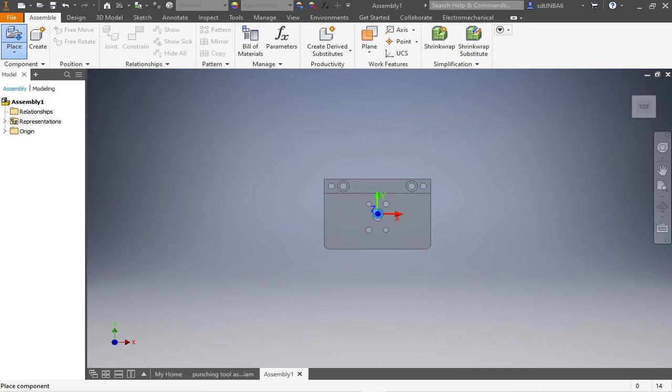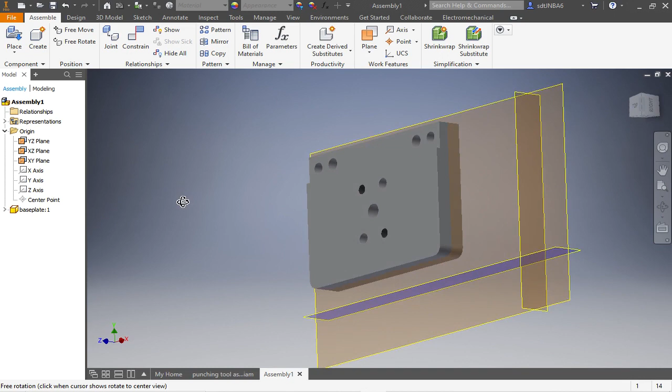Bring in the base plate. For the first part, I always like to see all the origin planes, so I'm going to switch on the visibility. In my case, I want the retaining bolt pointing to the Z-axis, so therefore I have to place the bottom of the base plate on the Z-X plane. Go on Constrain, take the bottom, take the XZ plane, and make sure this part is pointing upwards. Say OK. To make the visibility a little bit better, go on View, go on Visual Style, and switch on the Shaded with Edges. Now we can see the part better.

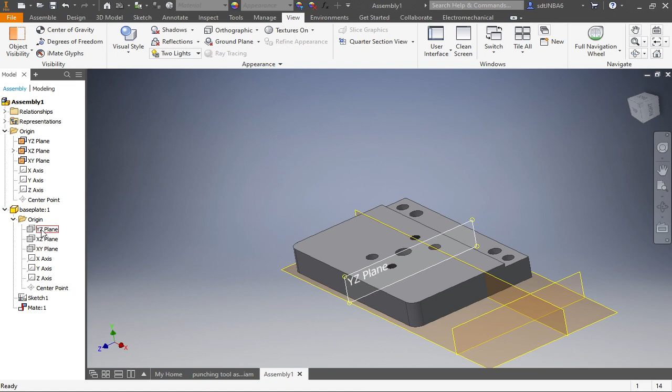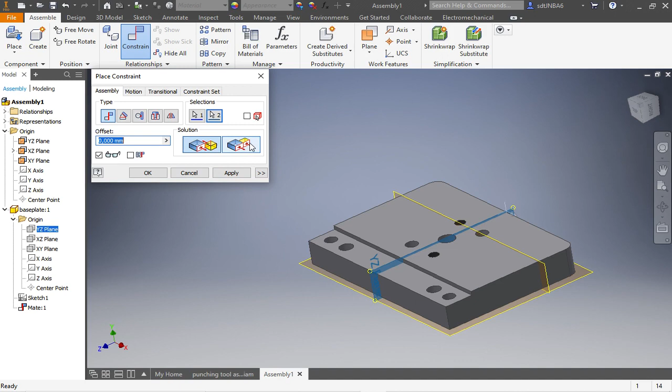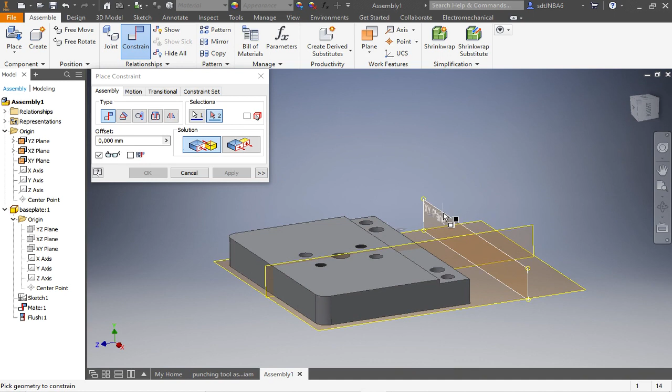So the next thing we have to do is putting the center of the base plate to the center of our coordinate system. It's the YZ plane. So go on the base plate, go on Origin, take this plane, the YZ plane, assemble, go on Constraint, and now we have to make it center to this plane. Now take care, the part is pointing the other direction, but I want to have it to the positive Z direction, so I have to flip it around. The solution here is taking the flush option. Say OK. Now the only way to move it around is like so, and I want to have the back of the plate matching up with this plane here. So go on Constrain, go on this plane, and on this one, the XY plane, apply, and then we're done.

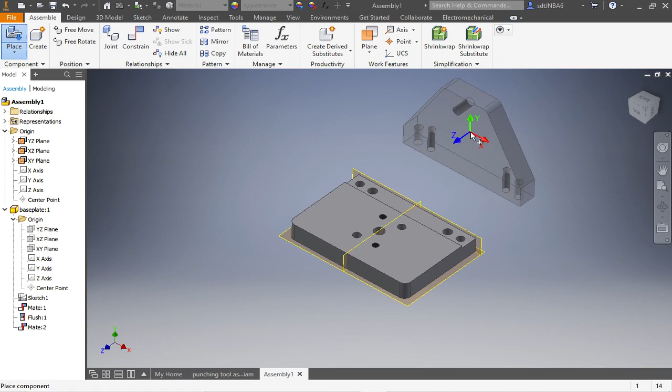This looks great. Next thing will be the vertical plate. Go on Place, go on your folder, go to the vertical plate, open it up, click once, click Escape. Now I want to place the vertical plate on this level here where it will be mounted. Click on the surface here, click on the bottom surface. That looks good. Take care of the direction of the hole. It has to point to the left side of the assembly. So apply.

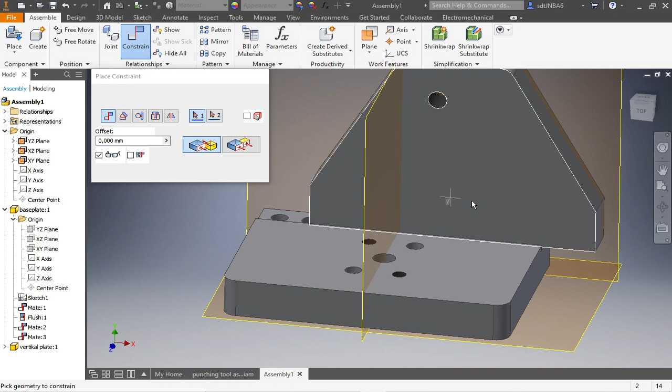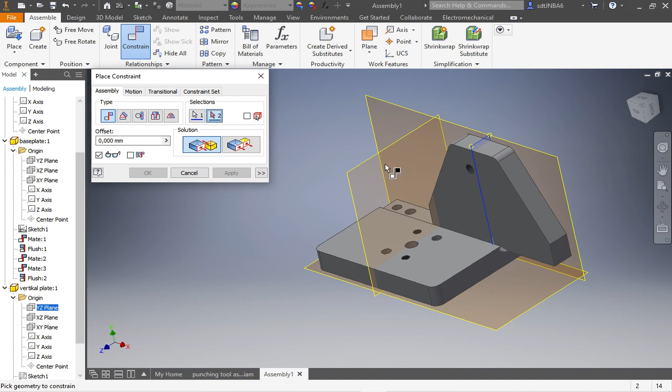Now there are several ways for the next position. I take those surfaces, match them up. Now you can see I have to flip it around to have the hole pointing to the left side. Say apply. Now the only degree of freedom I have is this one, and I want to match up the center of the vertical plate. Open it up here, going to the origin, selecting the plane and match it up to the origin plane, or you can take the middle plane of the base plate. Both ways work. You have to flush again, in my case, and now we're done.

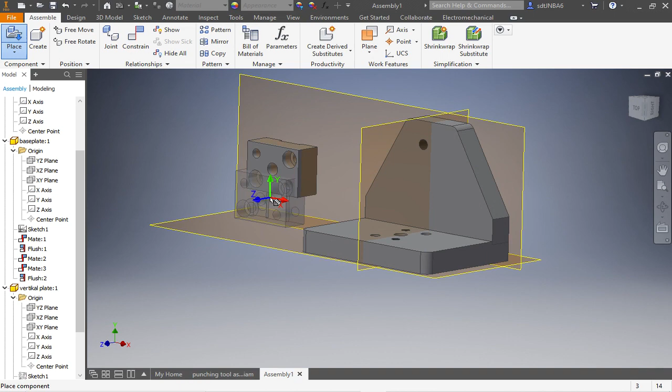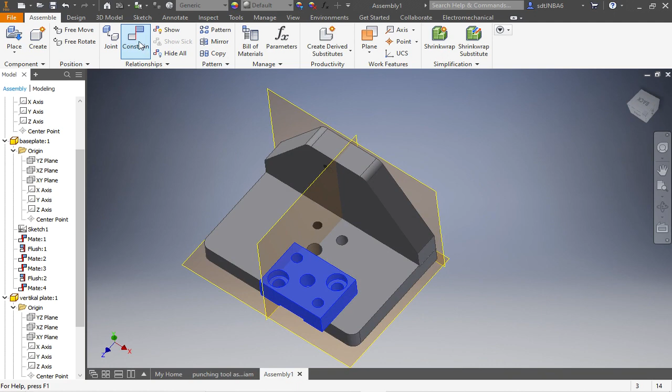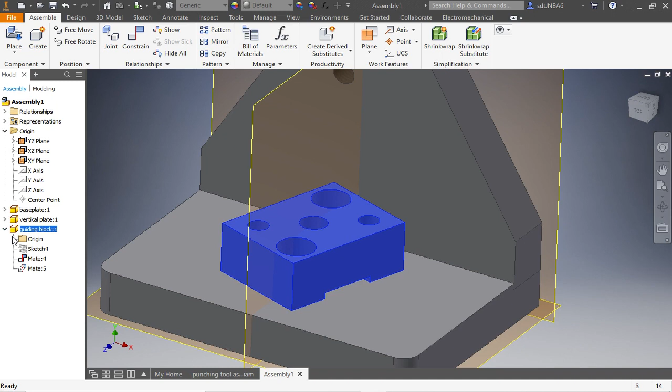Next thing will be the guiding block. Place. Open the guiding block. Left click, Escape. At first, we're going to match the surface where we have the contact, those two, apply. Then we have several ways again to match it up, but in this case it would really make sense to make the punching holes concentric, like so. Now the only degree of freedom is turning it around. Now we can search for the middle plane in our guiding block and make this one matching up to the origin plane of our assembly.

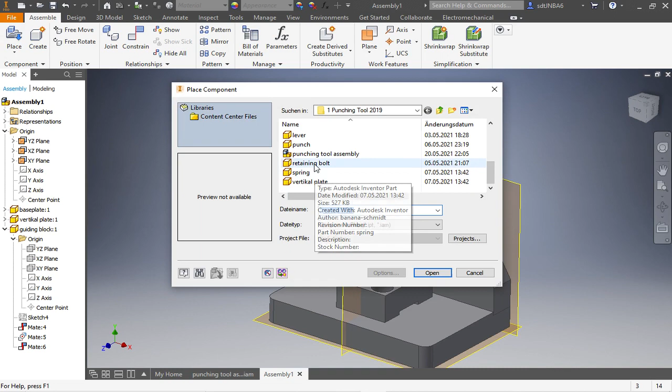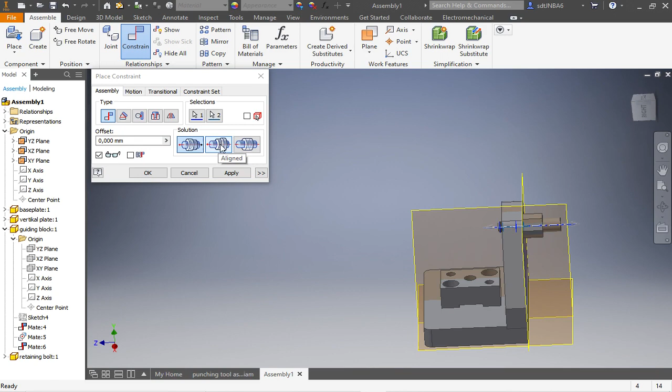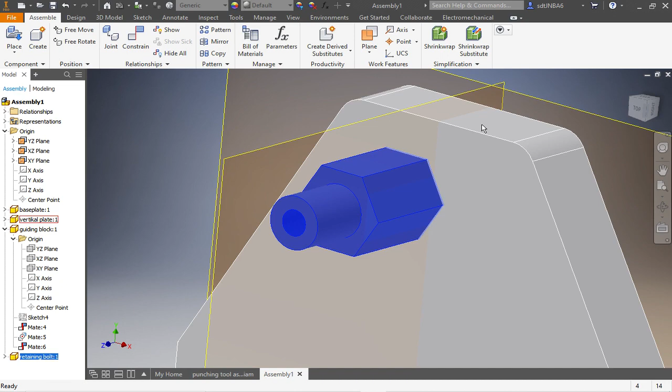Next part will be the retaining bolt. In this case, I prefer to start with the concentric constraint. Now, if this happens, that it's pointing the opposite direction, you have to take the second solution for the alignment to flip it around, apply, then you go on this surface, turn around, take this, apply. The only thing that's left is that the bolt is turning, so we want to have this surface parallel to the upper surface, for example. Go and constrain, click the surface. Now we have to change the option to angle, take the first solution and click this here. So we have a 0-degree angle between those two surfaces. Say OK.

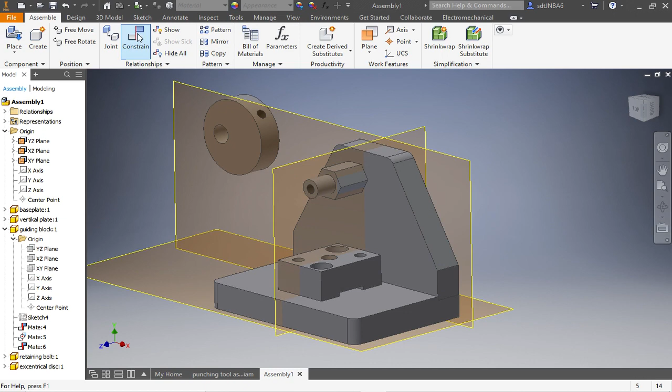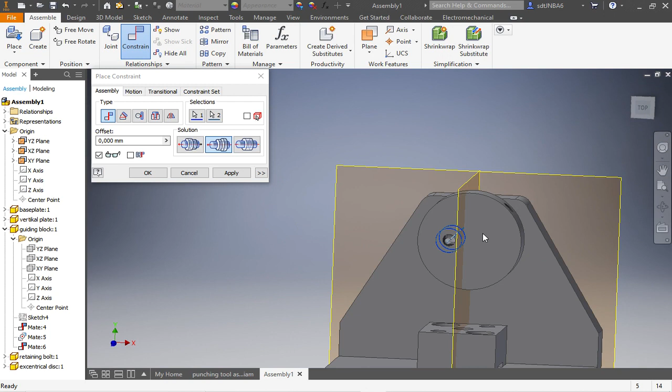And then we continue with the eccentrical disc. Enter the disc. Now we really got to be careful with the orientation. We start with the concentric constraint, and we have to switch directions because we have to make sure that the lever is pointing below the retaining bolt, like this. We say apply. Now we still can turn and move it around as well. Go on constraints again. Match up the two surfaces like so, apply.

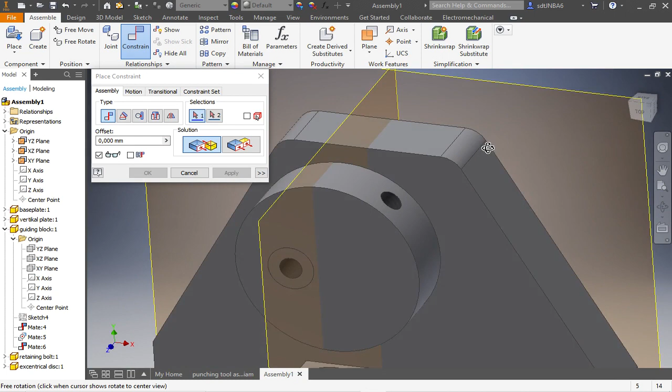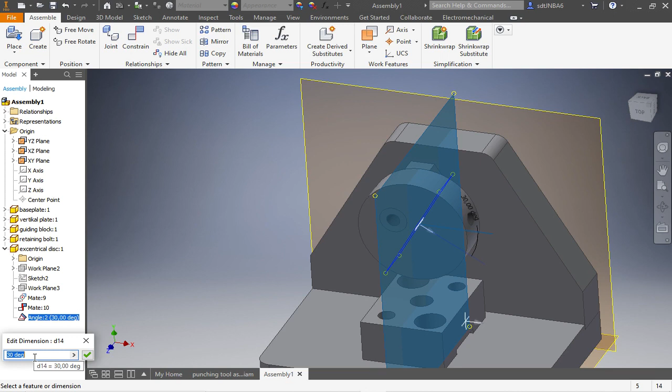And now we are going to open up a plane in the eccentrical disc, the vertical plane, this one, and say angle to this plane here. So later on, we have the option to turn around the angle or to play around with the angle, say like 30 degrees, to show if the assembly is working. Next, we bring in the lever.

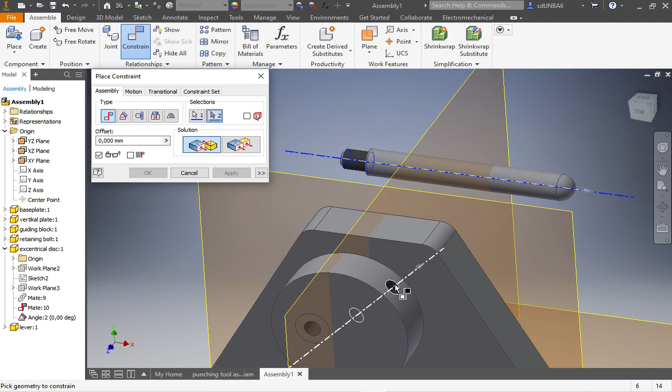We start with the concentric constraint. You can see we have to flip it around, say apply. Then we want to have the lever matching up with the surface here.

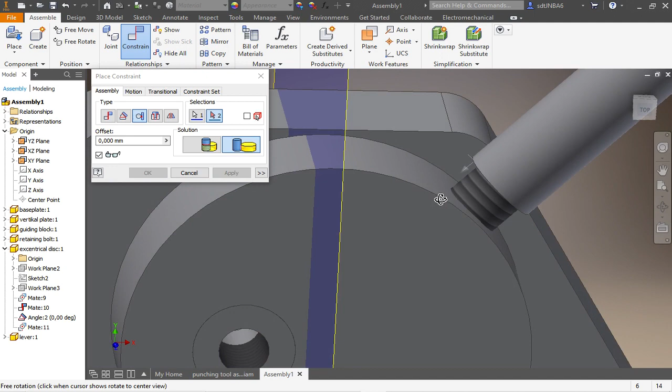So this time go on tangent, select the surface, and here the outer surface. Say apply.

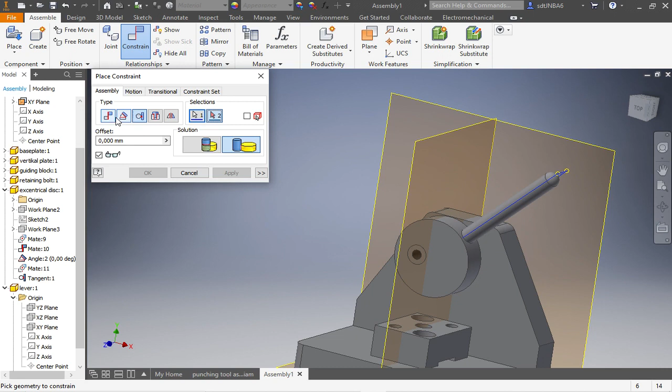Now the lever is still able to turn around. We don't want to have that. Go on origin, take a plane, maybe the XY plane or the other, it doesn't matter. We just take the first. Go on angle, first solution, and make it parallel to the eccentrical disc.

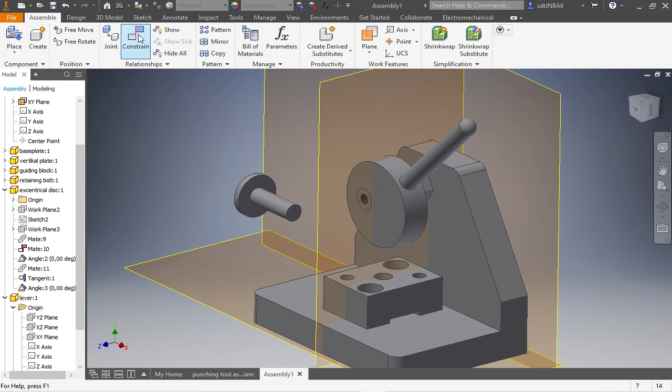Now we have to enter the punch, open the punch, make the punch concentric, matching up with the hole. We have to flip it around, say apply.

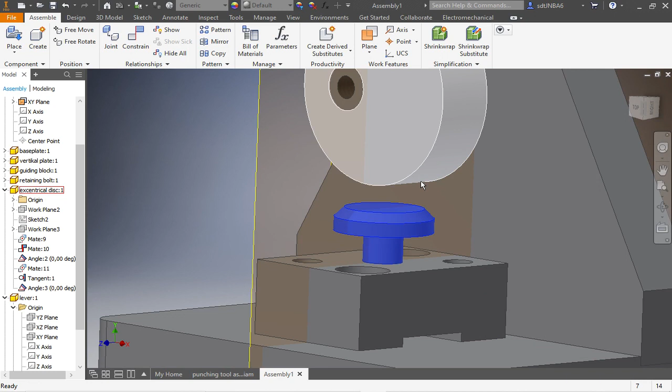Now we can turn it and move it up and down. So at first I want to make it tangent as well to the surface of the eccentrical disc. Go on Constrain, go here on Tangent, take the surface number 1, number 2, and apply.

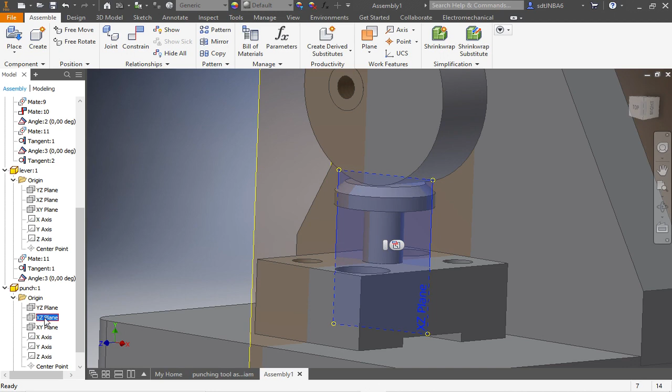That's okay. Now we still can turn the punch, therefore go on the origin planes of the punch, take the next one you like to, constrain, and we can make it with an angle parallel maybe to this one here, or you can match it up with the origin plane of our assembly. That's up to you.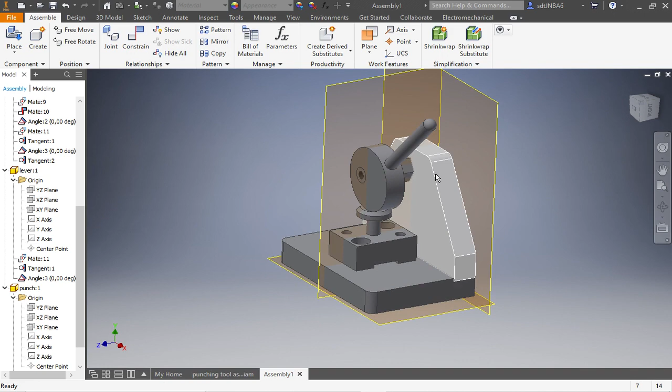Don't forget to save the assembly once in a while. So I will continue with the spring.

Place, spring, open. The spring is a little bit harder to place.

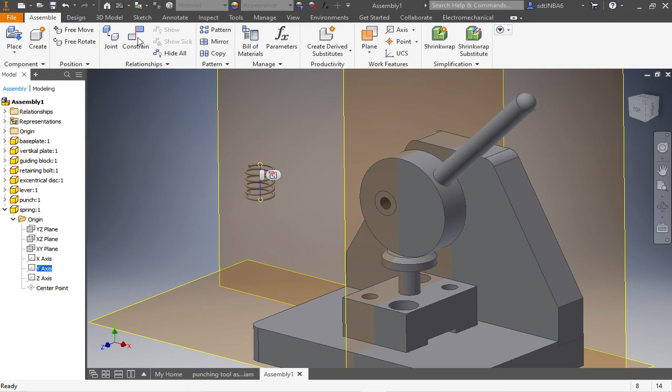What's most important is that you have to find the axis of the spring to make it concentric to the punch. Open up the spring, open the origin, and there you have the axis, the y-axis. Choose the y-axis, go on Constrain, go on the punch, and then you have the spring concentric to the punch.

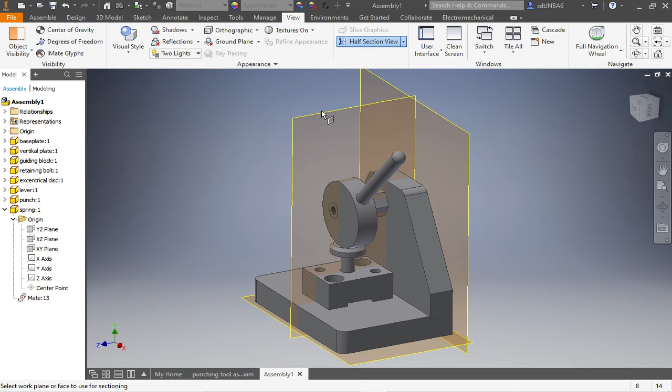Now the spring is somewhere missing in the assembly. You can go on View, go on Half Section, and choose the YZ plane, and then we can see where the spring has gone and pull the spring downwards, like so. Now you can switch off the half section view.

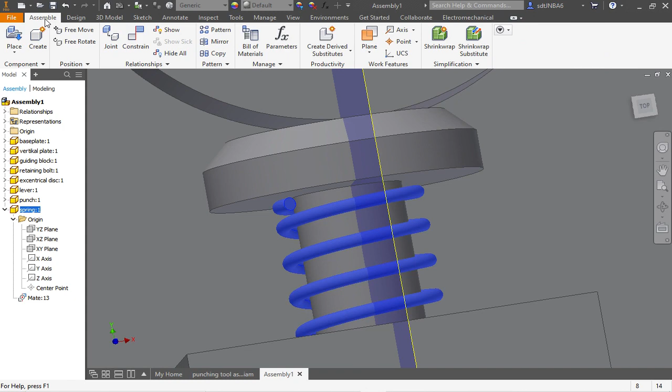So now we are going to match up the spring tangent to the punch by going back to the assembly, Constrain, Tangent, take the surface, the lower surface of the punch, take the ring here, or the circle profile of the spring, and now they're connected in this point here.

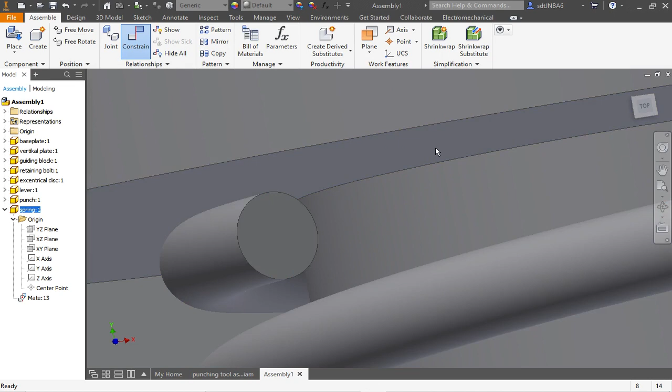Now the spring still can turn. Go to the spring, open up a vertical plane and set this plane parallel or matching up to the origin plane of your assembly. Now the plane is already chosen.

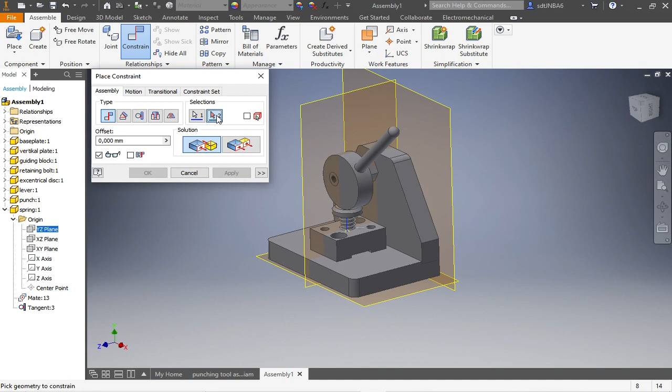Now I have the second selection. I take this plane in the middle and say OK. And now the spring is done.

Let's continue with the washer. Go here on Place, and this time we have to switch to Place from Content Center. Go here on the search function and enter in the ISO 7090.

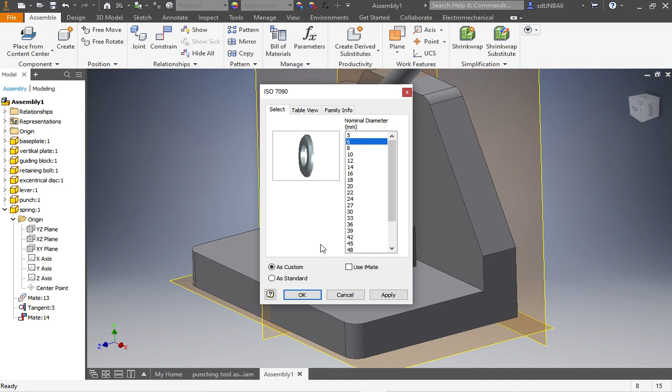We just take this washer over here, enter it, and now if you enter it for the first time, don't forget to click here as custom, and we have to choose the nominal diameter, which is 6 in our case, and say OK, and now you have to save it to your folder.

Here it is. Finally, we don't need the origin planes, so we select the origin plane and switch off the visibility. And this time I want to show you the joint function.

At first, click the part you want to place and then the assembly. And to make life easier, you go here from automatic to rigid to place the washer like so.

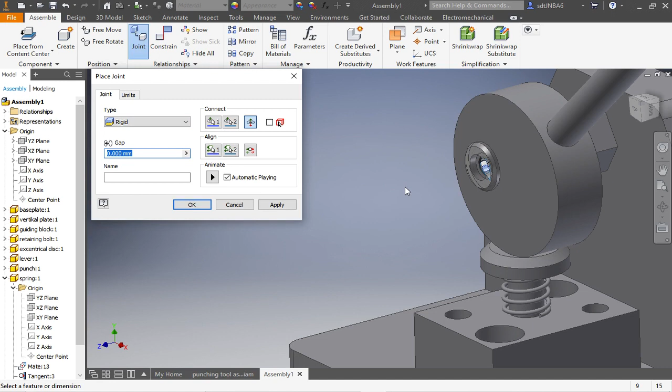Okay, and now you can see the washer is not moving around, not turning around anymore, and we're done.

We do the same thing with the next screw, screw number 10, slotted cheese head screw, which has an ISO 1207.

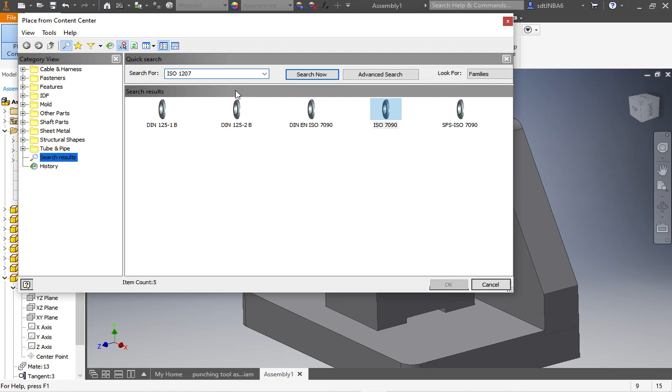Save as custom, M6. The length is 8. This is okay.

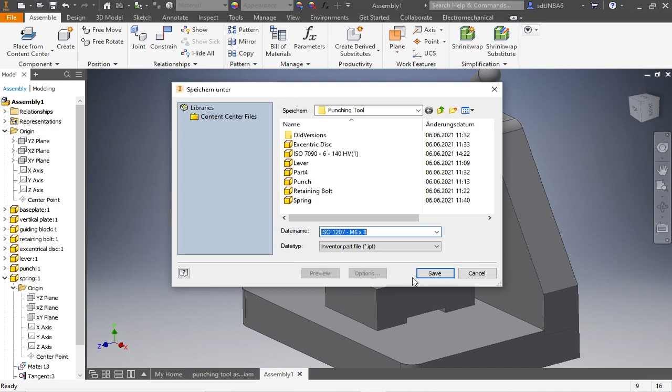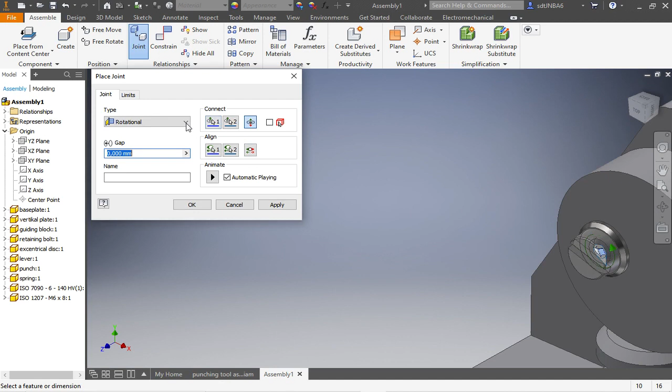So I try to use the joint function, selecting the head of the screw and the plane of the washer, trying to fix it with the rotational tool, but unfortunately I can see we don't get the right orientation of the slot.

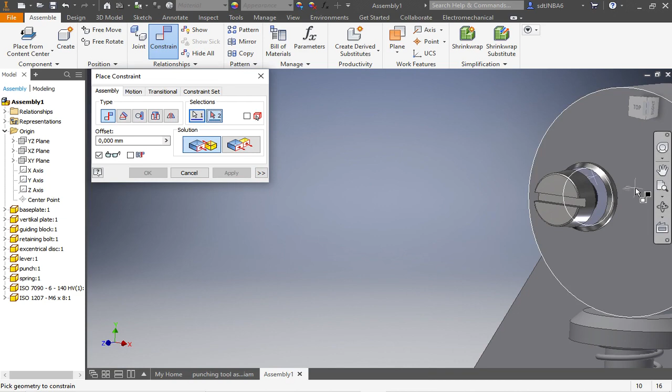So we go on cancel and insert it manually with the constraints. Therefore we go on constraint, selecting the axis of the screw and the hole, say apply, choose the surface of the washer and the screw here to match it up, say apply, and then we want

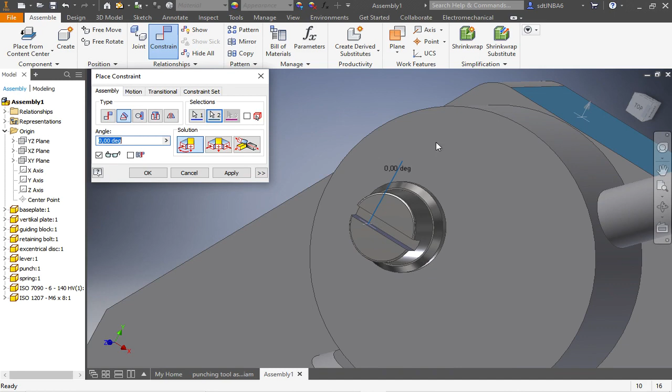to make it parallel to this surface, so go on angle, go on solution, go on this surface of this slot and this one here, and you have a 0-degree angle. Say OK, and we're done with that.

Last thing is we have to enter the parallel pin and the screw. Therefore we go on the position number 11, hexagon socket head cap screw, go here, place from content center, it's ISO 4762.

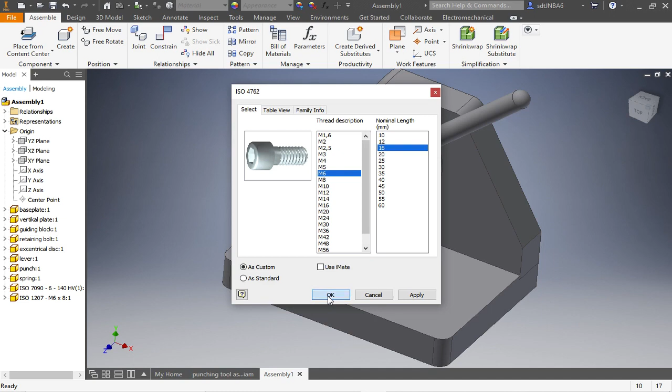Choose the screw, enter it, left click, save as custom. Now we have an M6 with a length of 16 millimeters. Say OK, save it.

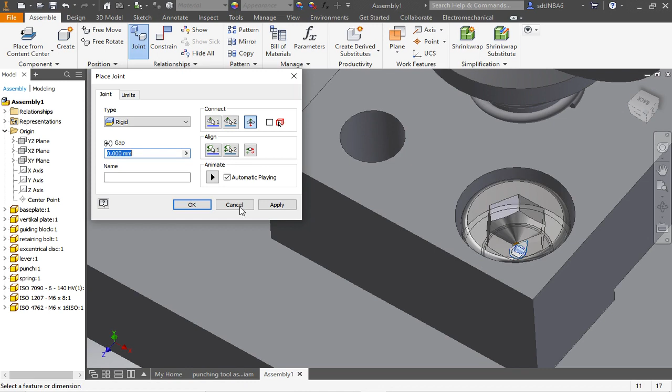Now go on the joint function, select the surface of the screw, go on rigid, and now the place where the screw has to be, like here. Then you say OK. For the second screw, click the screw, go on copy and paste, and do the same step again.

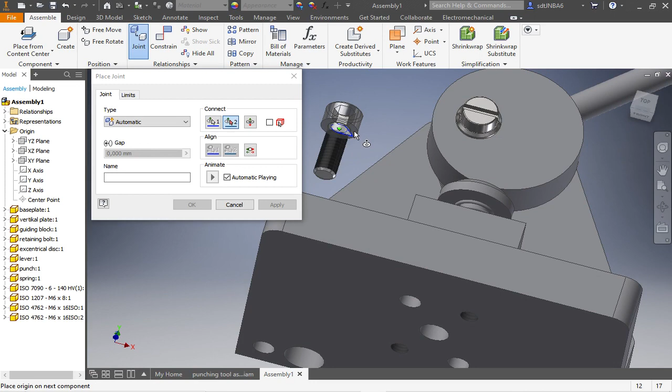Joint, select the surface. You can now choose rigid or later. Rigid.

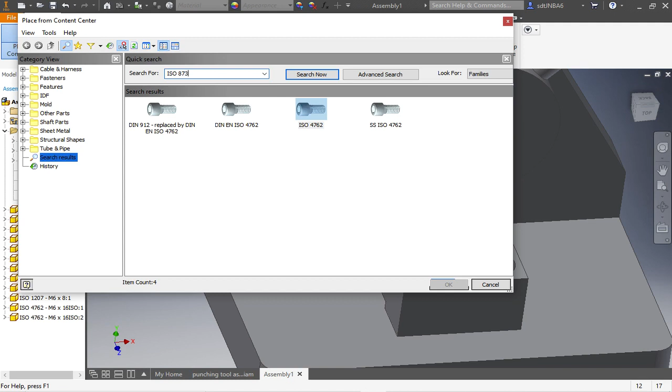Now that's perfect. I will only show you one parallel pin, ISO 8734. Choose the right dimension, 6 millimeters, length of 22, save as custom, OK.

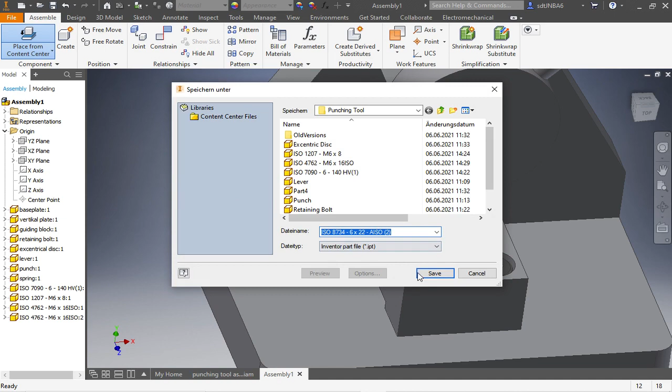Go on joint, select the surface, and now select the surface like so. Go on rigid. In case the parallel pin is pointing in the wrong direction, you can flip it around here with flip component and say OK.

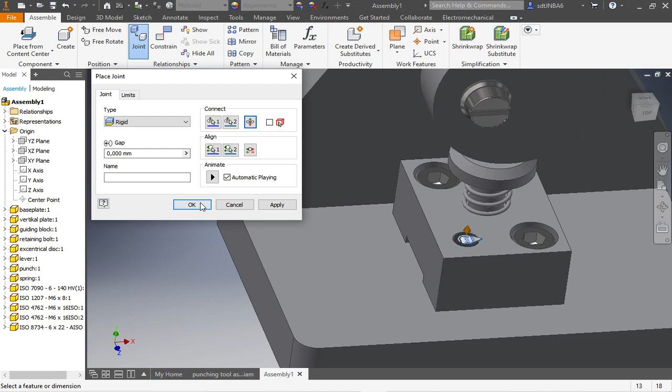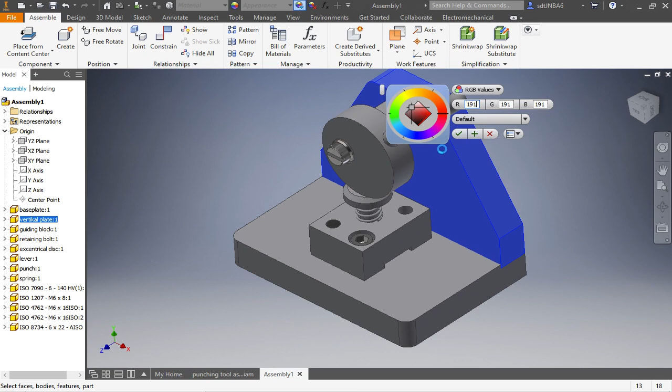Alright, so far you can enter the rest of the screws and the parallel pins by yourself, and later on you have to choose nice colors by going here on the color selection, choosing a nice color, selecting your part, and then you have a nice assembly that looks like this one.